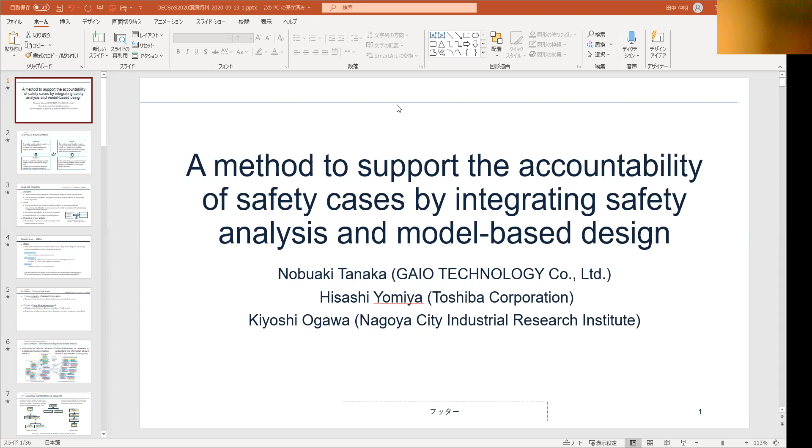First of all, we would like to explain our paper's overview. We think that the objective of our activity is to visualize safety analysis results in a more understandable way, to ensure that safety mechanisms mitigate the effect of failures.

One solution to achieve the objective is to create a model that integrates safety analysis results with system design, and divide the model into diagrams according to reviewers' concerns.

As a result of our activity, we confirmed that the method could visualize how the safety mechanisms protect against the effects of a failure on the internal block diagram. And we could visualize the result of FMEA-MSR with the proposed method.

One thing we found in the activity is that in the case study, we could understand that the safety analysis results interact across the boundaries of the system design elements. I will explain these topics in turn.

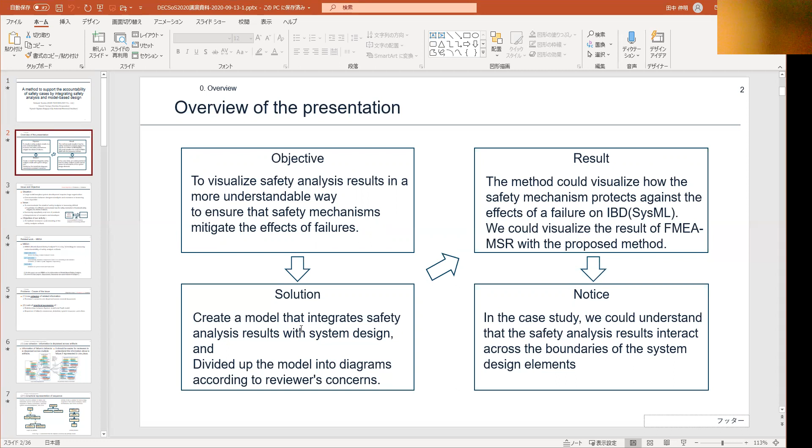This slide shows the issue and the objective of our activity. My understanding of the situation in embedded system development is that the system is getting more complex and larger, and that kind of huge development requires huge organization. Communication between developers, in particular designers, analysts, and reviewers, is becoming more important.

We think one issue is happening in the development: communicating the result of safety analysis is becoming difficult. In particular, it is difficult to communicate how the safety mechanisms of functional safety mitigate the effect of failures.

One reason for the issue is the increasing complexity and size of products, obviously, but also, thinking about functional safety standards such as 26262 and 61508, the standard requires independence of reviewers and developers. Therefore, it is difficult for reviewers to understand the design and the safety analysis results.

So we defined the objective of our activity as facilitating reviewers' understanding of the safety analysis artifacts, to solve these issues.

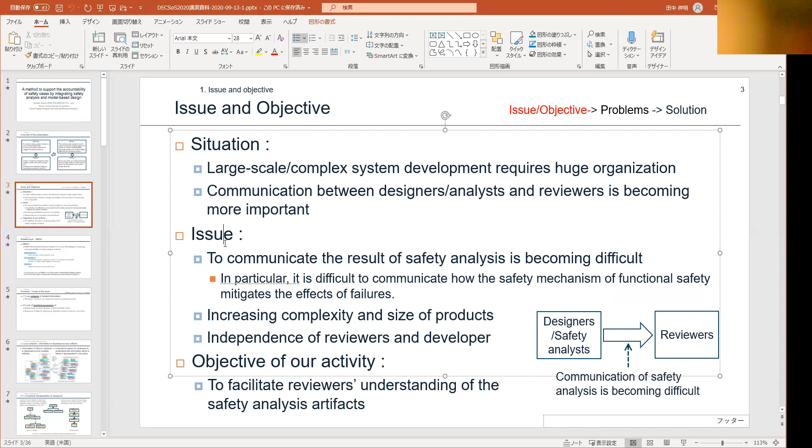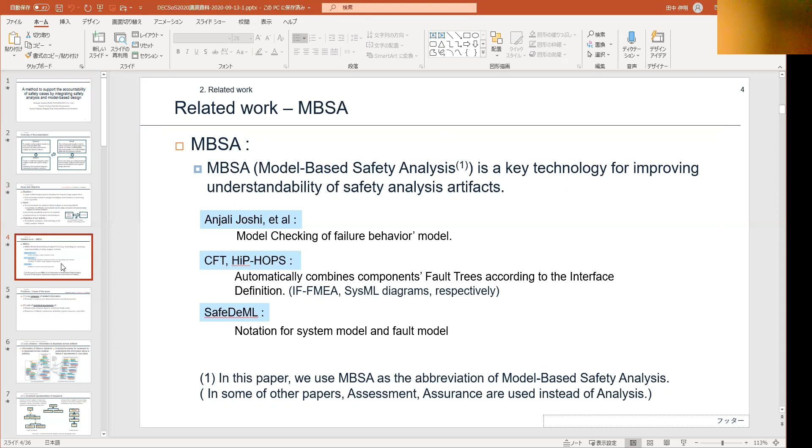We think that MBSA, model-based safety analysis, is a key technology to improve understandability of safety analysis results. We found some definitions of MBSA in various papers, but in our paper we use the term as the abbreviation for safety analysis using model-based technology.

Let's go on to the next topic: problems. What is the cause of the issues? We think two problems cause the issue.

One is low cohesion of related information - reviewers' concerns are dispersed across several documents. That is one problem. The second problem is lack of graphical expression.

We think relationships between the system model and fault model should be visualized, and the sequence of failures - occurrence, detection, system response, and effects - should be visualized.

This slide explains our intention in using the technical term 'low cohesion.' We think information is dispersed across artifacts of safety analysis. Please see the left-hand side of this slide: information of failure behavior is dispersed across multiple artifacts in system design documents, FMEA sheets, and FTA diagrams.

Please see the right-hand side of the slide. It should be easier for reviewers to understand information about the failure if it is represented in one place. We mean, let's aggregate the information which is a concern of the reviewer, the user of the document.

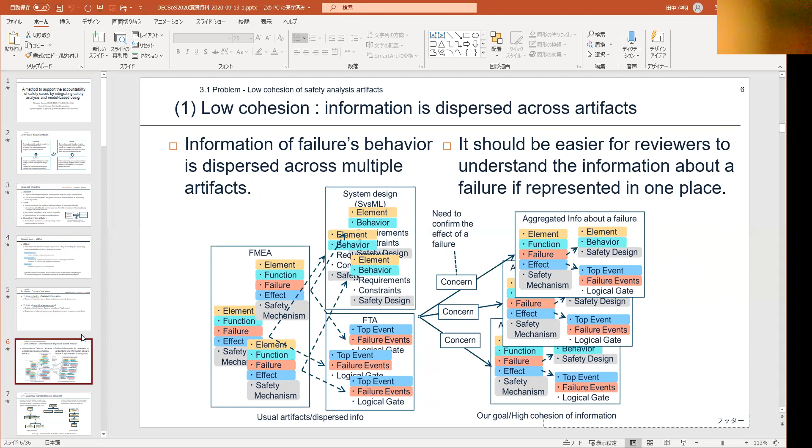On the second problem, graphical representation: if we think about the sequence of the effect of a failure, please see the left-hand side. Fault tree model is suitable for failure rate calculation, and it is necessary, but the model does not express the sequence of failures - occurrence, detection, system response, and effect. The activity model is on the other side.

Suitable for representing sequence of failures, behavior, safety mechanisms, and effects as flows. Therefore, in some cases, the activity model is beneficial for the users.

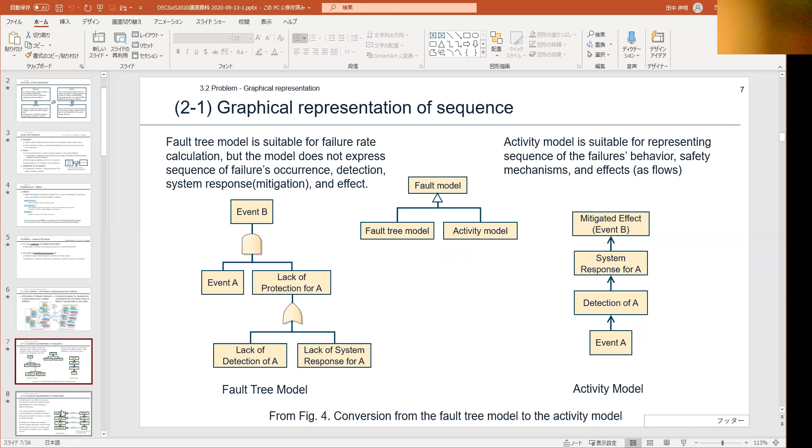The second graphical representation is the relationship between the system model and the fault model. Visualizing the correlation between the system model and the activity model will facilitate understanding of failure behavior. The activity model is suitable for representing this correlation because its structure is similar to the system design.

So if we draw a line that describes the relationship between system design elements and the fault model, it will make it easier to understand the system's behavior when failure occurs. That is our

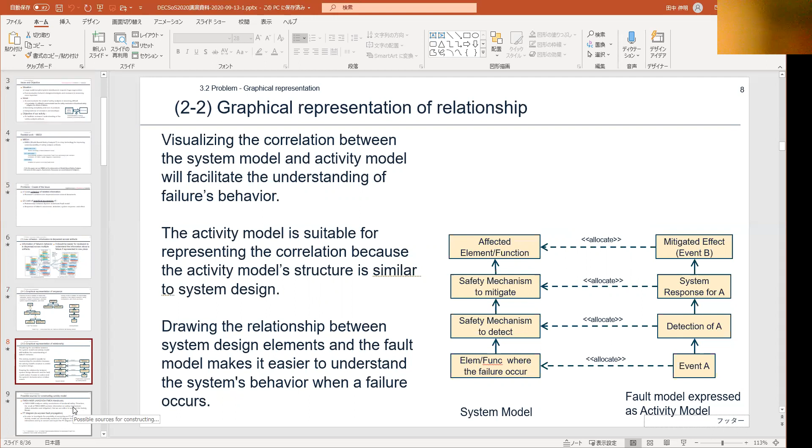intention: to represent the relationship between the fault model and the system model. And if the activity model is beneficial, how can we get the activity model? We think that two sources are available for constructing the activity model.

One is FMEA-MSR. FMEA-MSR was introduced in the AIAG VDA FMEA handbook published last year, and it analyzes safety mechanisms of functional safety. Therefore, the result of FMEA-MSR contains information about safety mechanisms, and we can utilize that information.

The second one is the FT diagram. In order to investigate the possibility of converting an FT diagram into an activity model, we intentionally created an FT diagram that includes interactions and tried to convert and import the FT diagram into an internal block diagram.

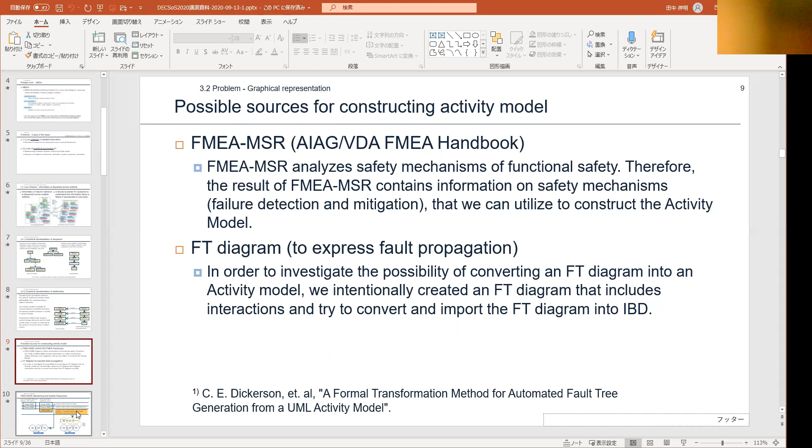This is a brief explanation about the FMEA-MSR. FMEA-MSR analyzes failure causes under customer operation conditions, and it contains failure mode. It considers whether or not failure mode causes are detected by the system.

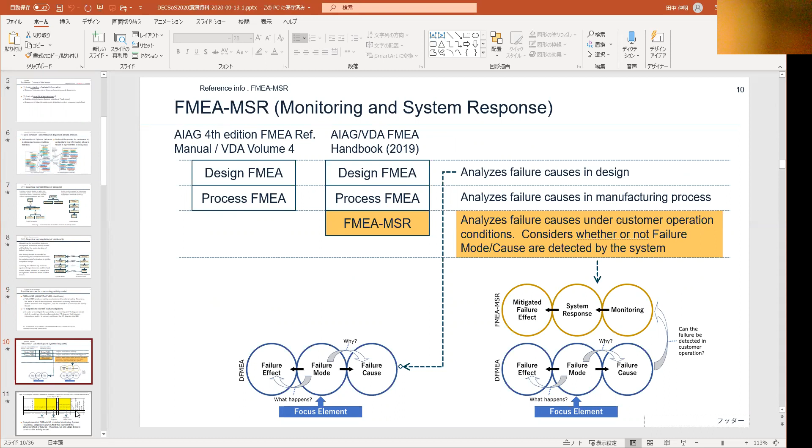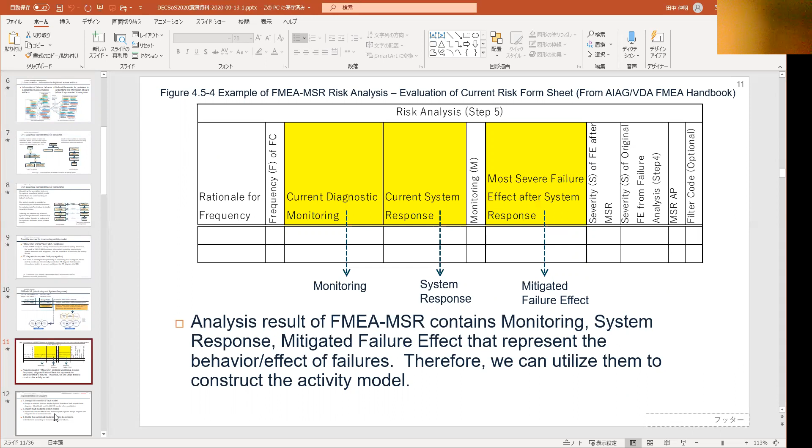As you can see on the right-hand side of the slide, the result of the FMEA-MSR contains information about the safety mechanism, monitoring, system response, and mitigated failure effect. Therefore, we can utilize this information to construct and visualize the activity model.

And next, this slide shows the solution for the implementation, how we implemented and solved the problem, how we provided the solutions. The first one is designing the notation of the fault model.

Designing a notation, we designed a notation that can display the system model and fault model in one diagram, with SafeDeML, which was presented at SAFECOMP 2019 last year, and SysML 2.0, which is under standardization.

If they are available in our activity, we could use them, but maybe because we are not familiar with them, or they are not expert enough for that, or they are not available in our activity, even though they can express the fault model, in our activity we designed our own notation to utilize for the visualization.

The second solution is that we imported the fault model into the system model. We imported FTA and FMEA data into the system diagram. We developed this prototype functionality in a software tool.

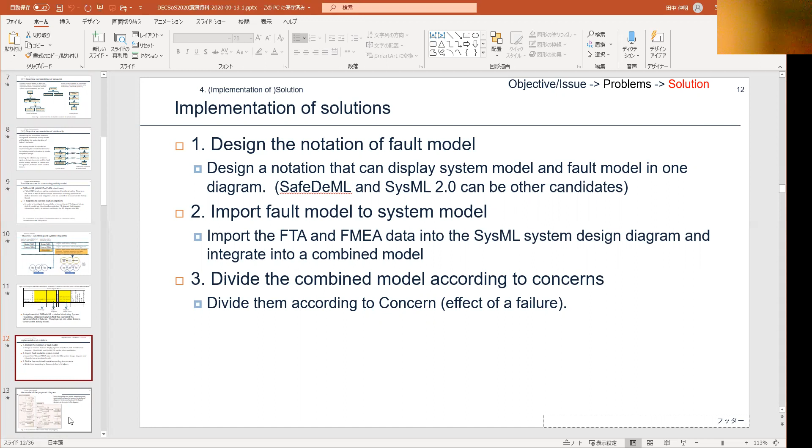The third solution is that we divided the combined model in the system tool according to concerns. We think that one big or important concern in review is the effect of a failure, so we divided the model according to each failure.

This slide shows the meta model of the proposed diagram. When designing UML or SysML related diagrams, meta models are used to express the design of the diagram and the notation. The meta model abstracts the logical structure of elements and their relationships in the diagram.

We provided a system model in figure 2, but we utilized the existing SysML diagram for describing the system model, which is written in SysML. On the right-hand side, the fault model is not available in SysML, so we added failure mode, detection, system response, and failure effect to the fault model. We also provided a relationship between the fault model and the system model.

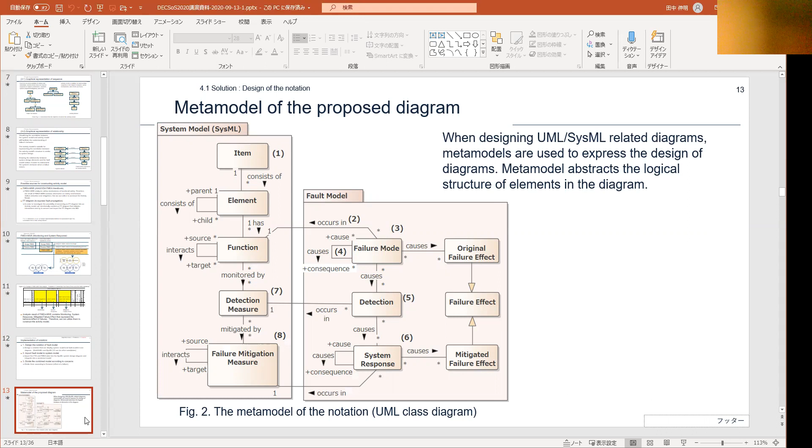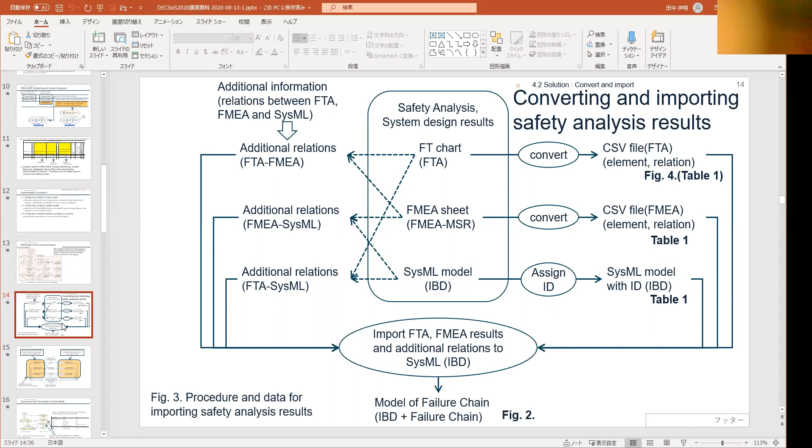This slide shows how we converted and imported the safety analysis result into a SysML diagram. Please let's go on to the next slide. On the right-hand side, figure 3 in the proceedings, the right-hand side of figure 3 shows the procedure to import elements and relationships described in each safety analysis result. On the other hand, the left-hand side of the slide shows the procedure to provide relationships between different safety analysis results.

from traceability info, because the relationship between different artifacts is expressed in safety traceability information or in other formats.

For example, the developer provides the same ID to the same element in different artifacts to show the relationship between elements in different artifacts. For relationships between components in different artifacts, we provided the relationship as a separate data format to the prototype tool.

And we imported the FTA and FMEA result into a system diagram, and we get the model of failure chain with the internal block diagram.

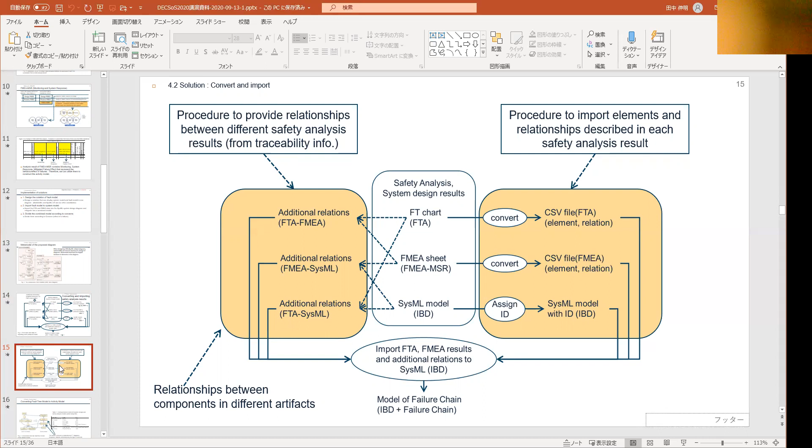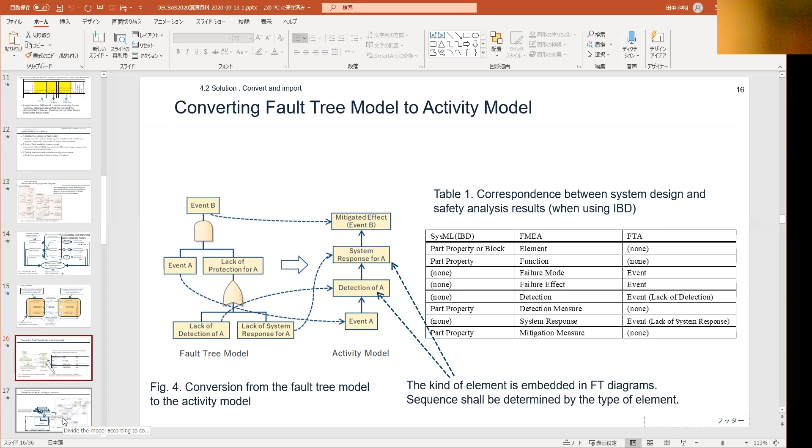The third solution is how we divided the model according to concern. As we explained earlier, in our use case, in our case study, we defined that the concern of the user, in this case reviewers, is failure, the effect of a failure. So we developed a prototype functionality to divide the combined model.

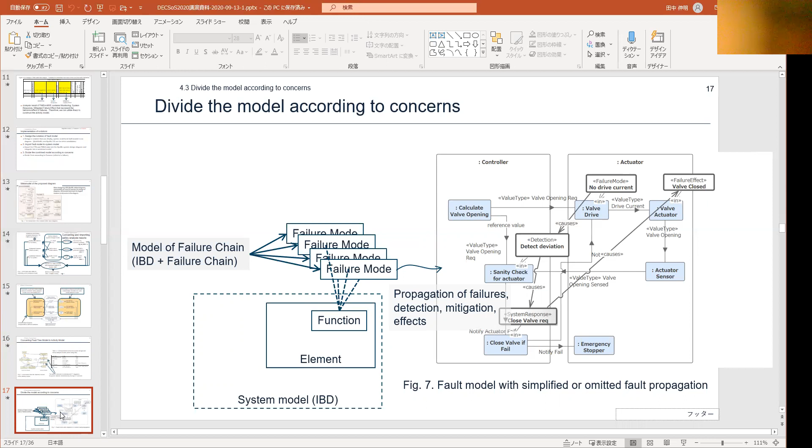According to concern, according to one failure mode, if the operator, if the user specifies one failure mode, the functionality extracts the effect of failures, and the extracted effects are merged into the internal block diagram. The functionality displays the sequence of effect in the IBD, internal block diagram, as you can see in figure 7.

But the diagram is a little bit complicated, and we think the reviewer or the user of the tool or functionality should judge which diagram or which notation should be beneficial for practical use.

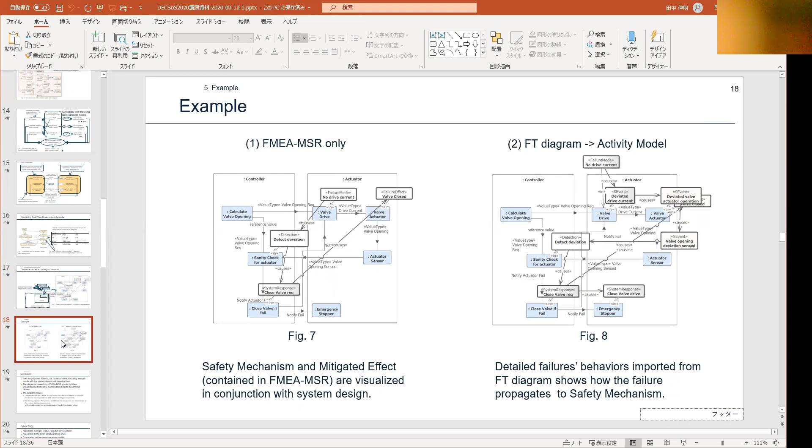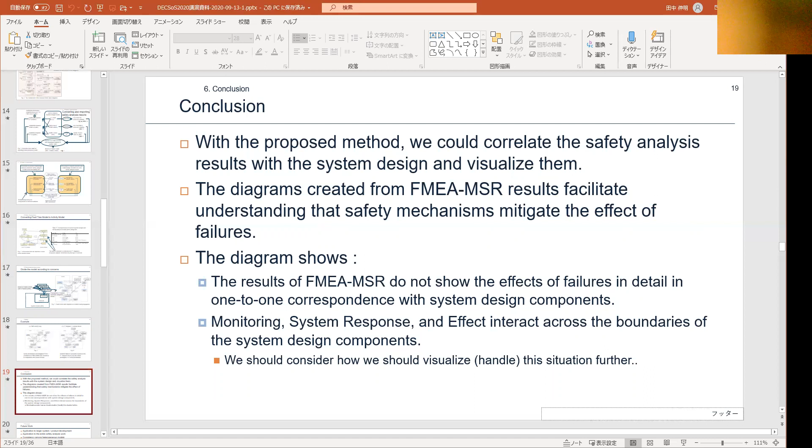The second point is we focused on visualization and improvement of the understandability of the artifact, but we think we should utilize this technology, including MBSA, to improve the safety analysis work entirely.

The third one is the problem we explained in the previous slide: consistency among heterogeneous models, safety model and system model. We found that we can visualize the difference in our proposed diagram, but this is an important topic in MBSA, so we should investigate further.